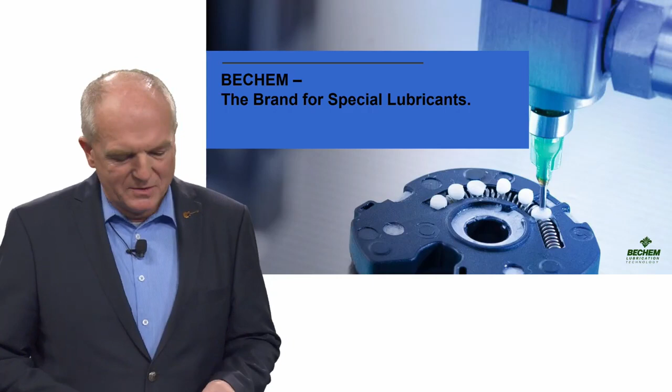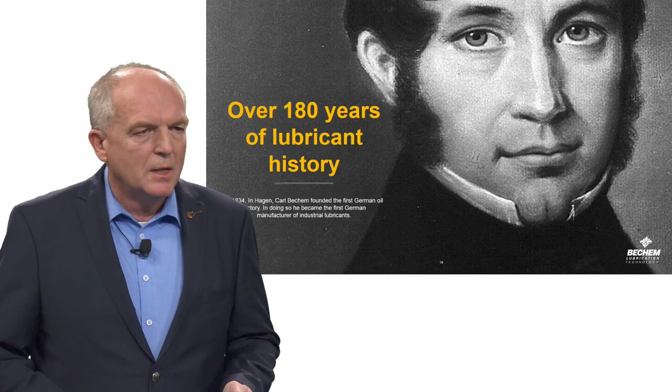We have different products in different areas, for example, for lubricating greases, lubricating oils, metal removal fluids, metal forming fluids, anti-friction coatings, and also corrosion preventives and chemical cleaners. We have 3 production sites in Germany, and then 1 in the US, 1 in China, and 1 in India. More or less 900 living, actively sold products, not only spray cans like you see here, but drums would be too big to show it here on the screen, so therefore we decided to go for a can, but nevertheless we can supply all kind of packing.

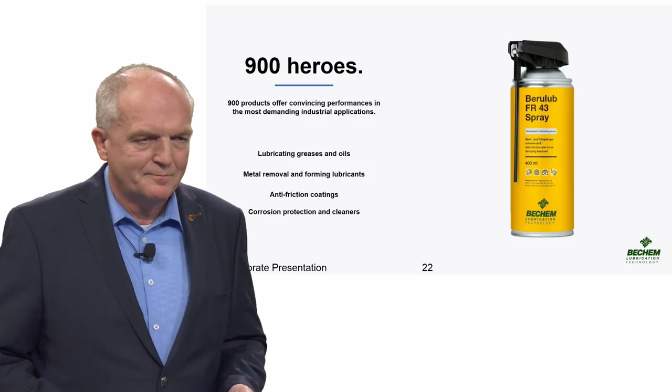And we are supplying these products in different kind of industries: the automotive industry, the aircraft industry, the railways, mining industry, earth moving equipment, metal working, metal forming industry, food processing, wood processing industry, and so on. So we are really the specialist for different kind of industries and different kind of application.

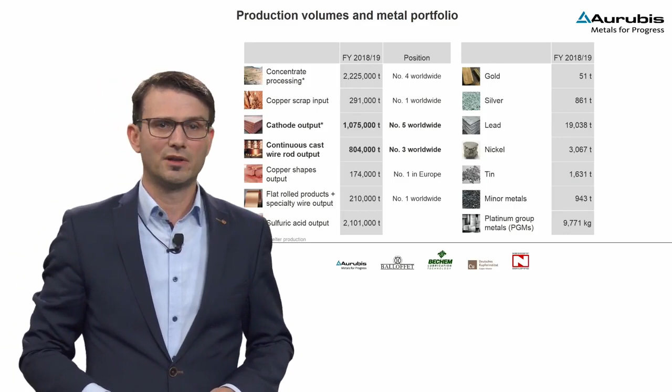Aurubis holds strong and leading market positions in cathode production output and respectively in copper wire rod output. Here you see figures from financial year 18-19 with around 1.1 million tons of cathodes and around 800,000 tons of wire rod. Beside that, Aurubis is a multi-metal refining company and produces metals like gold, silver, lead, tin and others. Aurubis has its own cathode basis, which is a fundamental position for our copper products and especially for copper wire rod, where 75% of all cathodes worldwide are consumed. Aurubis is independent from cathode supply from South America or other regions, but can rely on its own and very stable cathode supply.

Aurubis runs a production network of 2 fully integrated plants with cathode and rod production in Hamburg, Germany, and in Olen, Belgium. In Avellino, in the south of Italy, and in Emmerich, Germany, there are 2 standalone rod plants, with cathode supplies from partly Pirdop, Bulgaria, and Lünen, Germany, as well as Olen, Belgium. Deutsche Gießdraht, the well-known copper wire rod producer of DG Rheinrod, located in Emmerich, is now 100% integrated into the production and service network of Aurubis Group.

DG Rheinrod is a very well-known brand and stands for highest surface quality and drawability to thinnest wire diameters. The 4 rod lines are in excellent balanced production network to supply our customers in the EMEA region, from North Europe to South Africa, from Morocco to Egypt, with around 800,000 tons per year of Aurubis rod, Rheinrod.

Responsible sourcing is becoming more and more important due to society requests. Therefore, the copper industry, and Aurubis as part of that, launched in March 2020 the Copper Mark as an industrial standard monitored and assessed by independent parties every 3 years. This goes hand in hand with the LME's responsible sourcing approach. At Aurubis, we like and support the idea that the copper value chain is mutually demonstrating responsibility to improve and develop, and we are looking forward to certified mines.

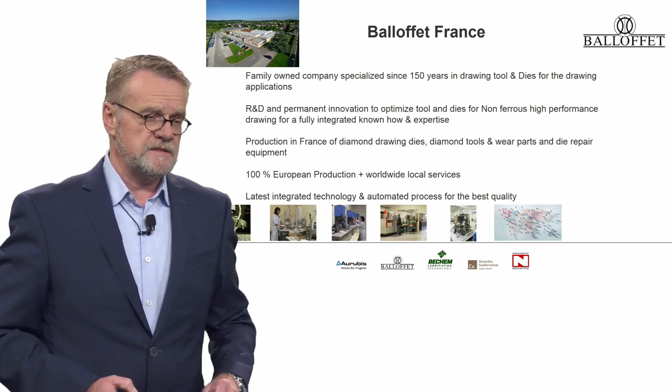Our product description for Balloffet is drawing dies from natural diamond and PCD, extrusion tools for the cable industry, also the compacting and stranding dies. Shaped dies is a very, very big growing market, also for the electric mobility. Enameling guides for the magnet wire, but also a big repolishing service for all used dies. We are also specialists in training and analyzing on the die repair of all people working in this field, and we are producing equipment for the die shop.

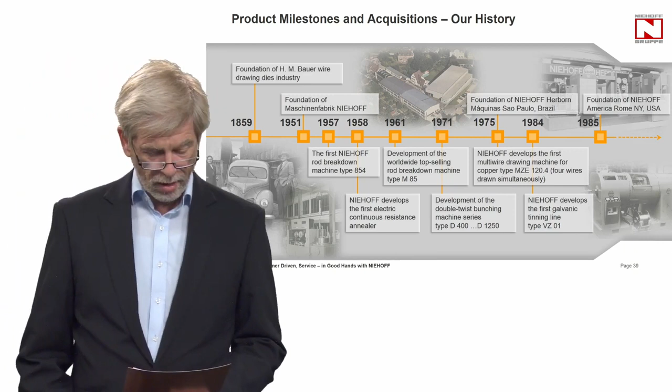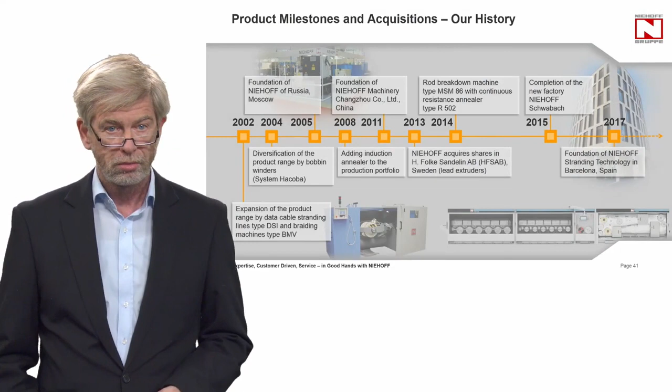NIEHOFF company was founded in 1951, but the origins or roots go back to 1859. But listing all these historical details would be too long. However, the new construction of the factory, which was completed in 2015, should be emphasized.

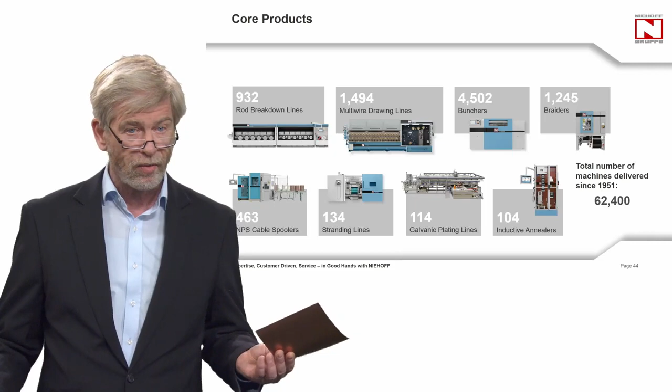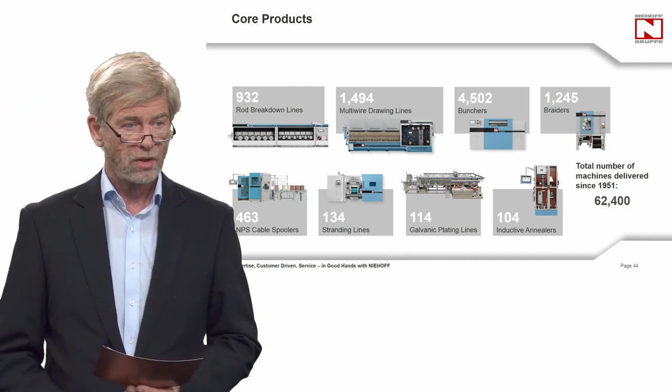Our products. Since 1951, NIEHOFF produced 930 rod breakdown machines, nearly 1,500 multi-wire machines. We produced 4,500 bunching machines with a bobbin size from 400 up to 2,000 millimeters. Braiders, NPS spoolers, stranding machine for insulated wires, also with a bobbin size from 400 up to 2,000 millimeters. Galvanic plating lines, and last but not least, inductive annealers.

Mobility, urbanization, energy distribution, digitalization, power generation - these are the challenges of today and tomorrow. And how do we face these challenges? We are partnering with expertise, high cost efficiency, high flexibility, and reliable service worldwide. These are the demands on us and how our customers see us.

Thank you very much, Stefan. Okay, good introduction of an amazing company, and thanks for coming to Hamburg. Okay, thank you very much.

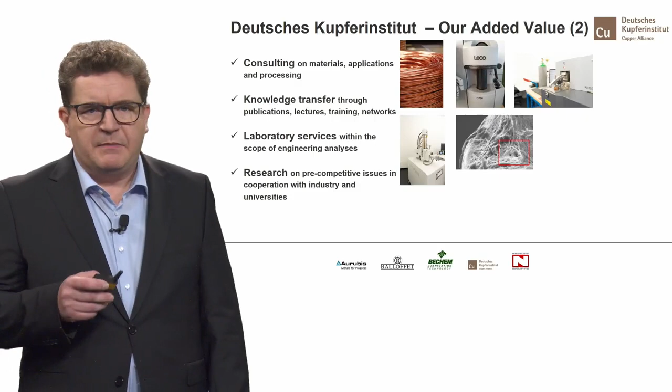But first, I would like to ask you to answer the following questions via Mentimeter. In your opinion, which elements are most important for a successful drawing process? Please choose and add them one after the other with a plus symbol, first the most important, last the least important: the die sets, the drawing lubricant, drawing machines, the people in the production process, or the wire material. Please vote now - we will have a look at the results later.

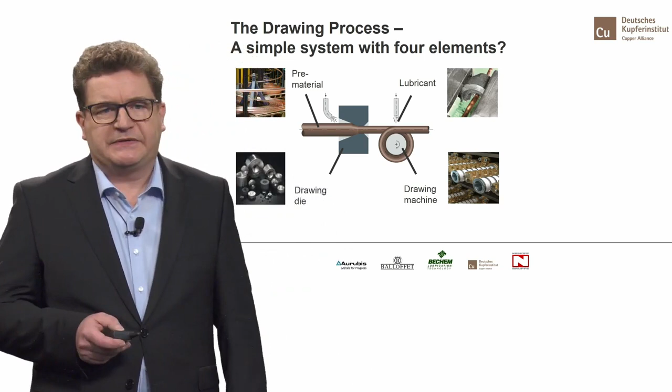When looking at the drawing process, it seems at first glance to be a fairly simple system with four main elements. In practice, however, the interlinking of several processes and a large number of drawing steps results in a complex system in which the causes of errors are not immediately recognizable, and the interaction of many individual influencing factors has an impact on quality and process stability.

Last but not least, the conception, selection, maintenance, and settings of the system elements are based on the decisions and assessments of the people involved in the process. Knowing about the process and the elements is therefore essential to achieve good results. In the following, we will now use the cup and cone breaks as an example to explain the influence of the individual system elements - wire material, drawing die, drawing medium, and drawing machine - on the drawing process.

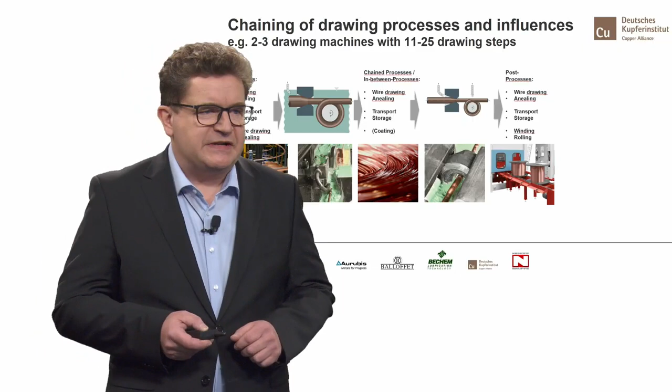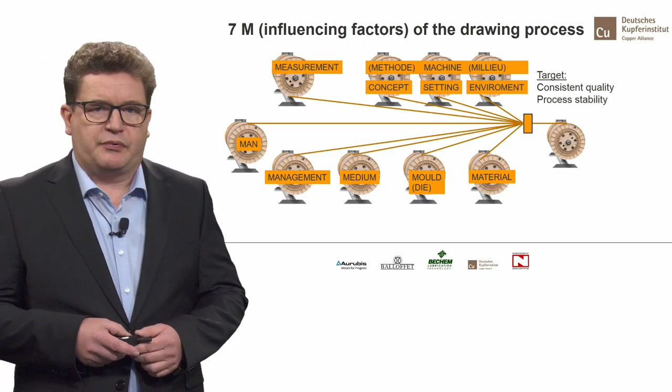And now I'm looking forward to Dr. Abrates from Aurubis AG, who will first give us an overview of the wire rod production process. Please, Dr. Abrates.

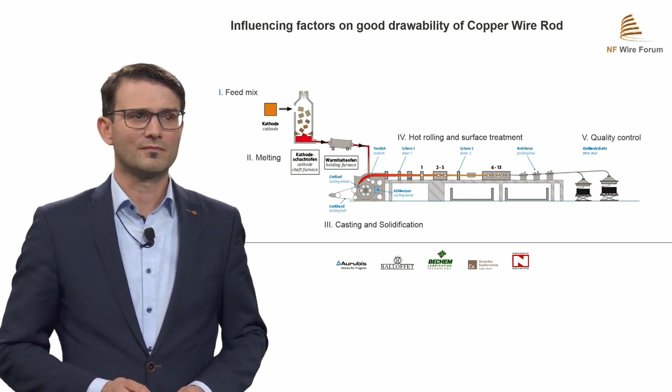Please see here the criteria which are important and form the basis for a successful drawing process of Aurubis Rod, Rhine Rod. As mentioned, best feed mix with grade A cathodes, oxygen content below 250, a delta temperature of copper melt versus copper solid temperature, cooling water min-max values, rolling current at the rolling stands in min and max values, low Defectomat and Ferromat signals.

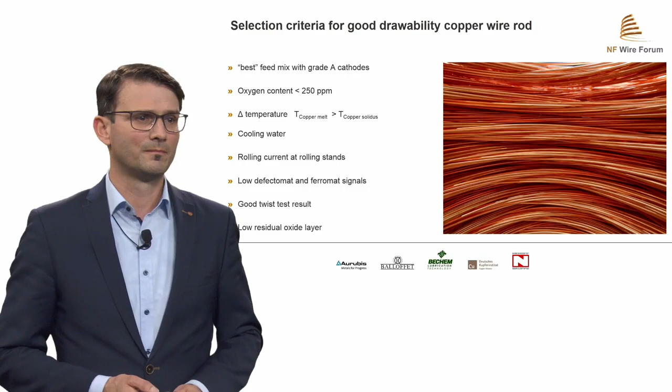Good twist test results, and last but not least, low residual oxide layer. But unfortunately, there are incidences resulting in wire breaks, which lead to downtimes in your production departments. It's important to understand what kind of wire break type the sample shows and what leads to the different wire break types.

All in all, a wire break is the unfavorable result of interactions between the wire material, drawing dies, emulsion, and the machines, as well as drawing process parameters.

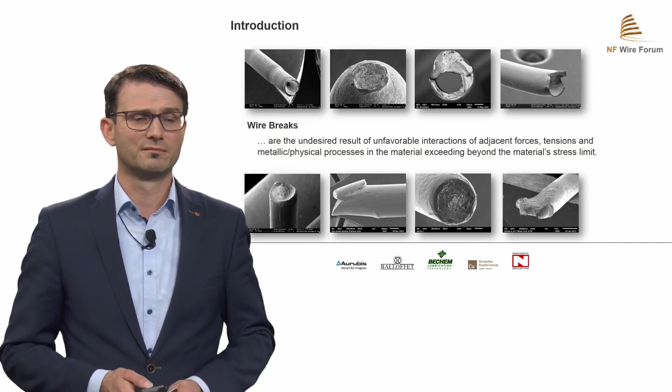In general, there are well-known wire break types which occur from time to time in every wire production facility. There are three main types: first, cup and cone; second, ductile force break; third, inclusion break. Other mentioned types are also known and present, but with less frequency in our experience.

Let's look at the features of a wire break known as cup and cone. What is important? You see here a deep hole on the cup side, a cavity in the middle of the wire, and a cone. You see a necking tip.

You see surface defects, shown here on this photo. When you do a metallurgical cross-section, a longitudinal one, you see the so-called craw feet in the longitudinal cross-section—so no impurities, no phase agglomerations in the copper wire matrix.

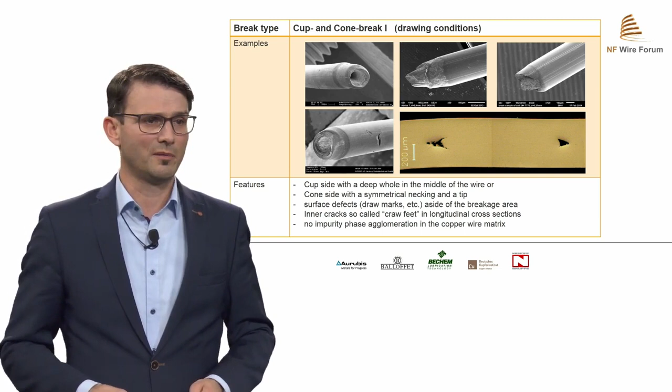What are the damage mechanisms? High shear stresses between the wire surface and the neutral line induce local failures where the max material stress level is exceeded. Then the inner cracks, the craw feet, begin.

The tip of the craw foot is oriented in the drawing direction. With additional strain, these cracks grow and reduce the load-bearing cross-section of the wire until the material fails or breaks. The copper wire rod can also influence cup and cone breaks, which is why it's important to apply the appropriate production criteria mentioned earlier to avoid them.

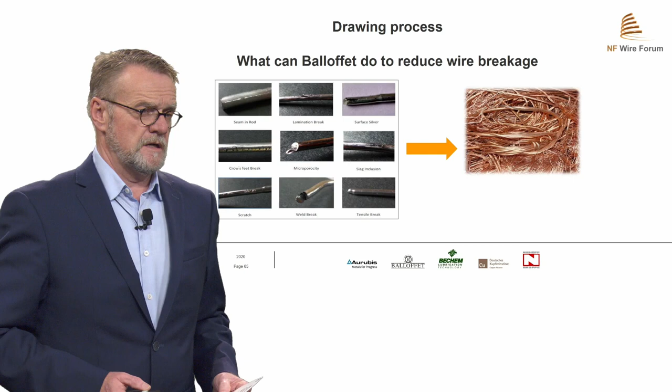Wire breakage is not really nice. Nobody wants these, because wire breaks normally mean less productivity. We lose a lot of material. It is inefficient. But the question from my side and from the Balloffet side is: what can Balloffet do to reduce wire breaks?

The wire breaks, the view from the die producer is as follows. We have to check if the customer has used the wrong diameter, or the geometry is not respected, the polishing is too rough, the dies are not cleaned, we have mishandling on dies, we have imperfect technical matchings, so the specification from the drawing machine is not corresponding to the die sequence. The dies are fixed on the wrong position.

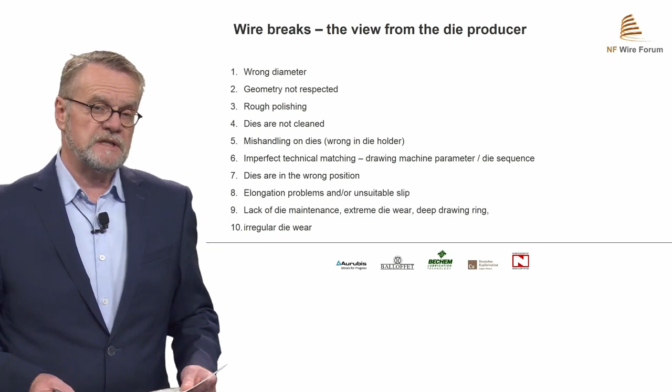The elongation problems and the slip is not suitable. We have a lack of maintenance, die maintenance. We have a lot of die wear. We have deep drawing rings, or we have irregular die wear. This is mostly a problem of wire breakage.

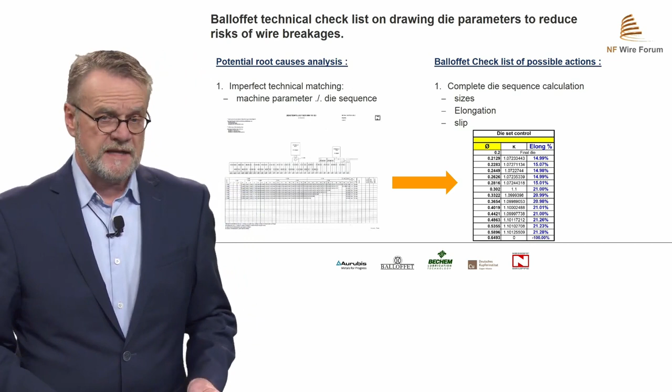At first, we have a checklist, and our technical checklist from Balloffet is to check all the parameters to reduce and to find the result. The root cause is, at first, we have to check the machine parameter and the machine specification, and to clear if the machine parameter is fitting to this die sequence. This is what we have to control, and you see here in these tableaux that you can check if this is correct.

The next step on the checklist is the check of the elongation. Is the elongation respected? What is later on the possible action by us is to control if the difference between the die elongation and the machine elongation is checked.

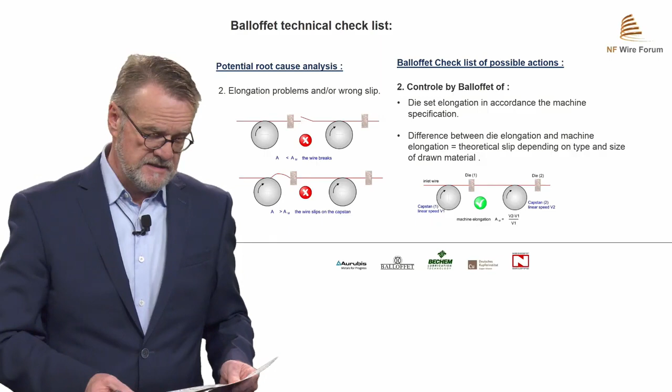On the dies, we have also many issues to control. The diameter at first, but also the not fitting geometry. We have to check the polishing, and we have also to check if we have used probably wrong tolerances. For these, we have a special specification where we see in the die if the blending is well made, and if we have on a multi-line machine tight tolerances, we have to check that from time to time we have 500 dies on the machine, and these have to fit.

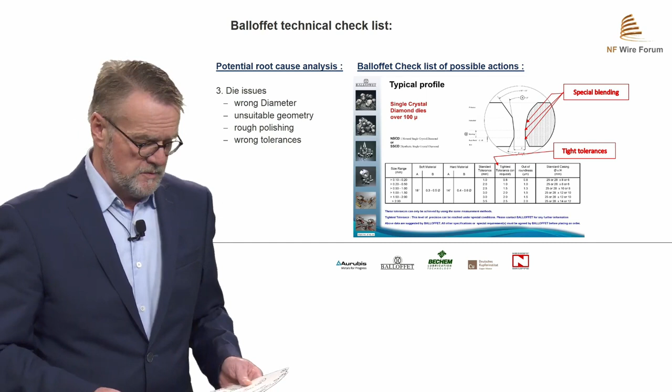The die analysis also checks the issues in the die. Is the die size with the adapted tolerances produced? Is the die geometry respected? The die blending, so it means from the angle to the bearing length, is this well polished? Is this not too sharp? And this is where mirror polishing is made.

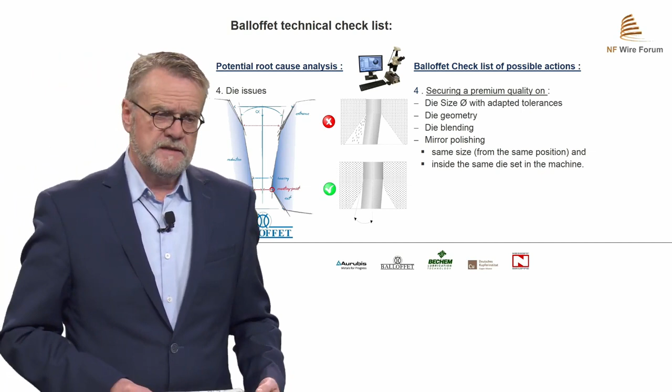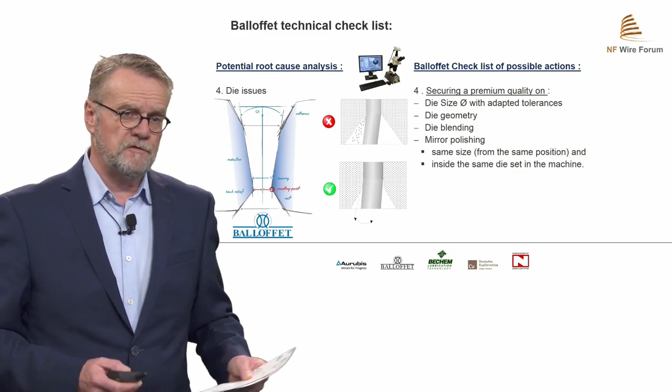And also the exit is very important, because if we produce fines in the wire process, then we produce the fines on the exit of the die. So it has to be nicely rounded. And what is very important on a die set is that all the same sizes on the same position on the machine have to be respected. And this means not for one set, for all sets, and in total probably 500.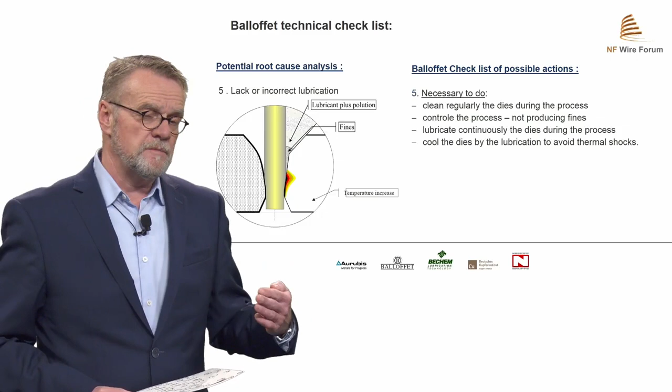Coming back to the next check, what we have to do is the lubricants, because we have to secure that the die is very clean and very regularly cleaned with a spray of lubricants during the process. Because if you see some fines in the die, it is coming from the die before, and the result is seen on the next coming die.

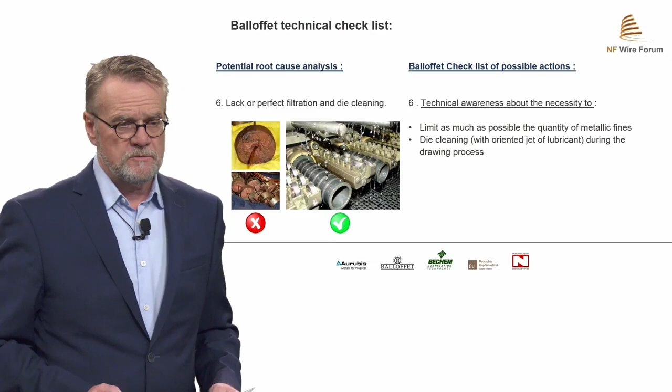The lack of perfect filtration and die cleaning limits as much as possible the quantity of metal fines. That means reduce the metal fines and clean the dies during the process. And this has to be made by a jet of lubricants during the drawing process.

And also the extreme drawing parameters, because we're using high speed, we have ultra-fine wires, we have a reduced slip. That means our dies have to be perfect, absolutely perfect. We have to check if there is a drawing ring inside, because in a drawing ring we are sticking material, and we take this material into the next die and we create problems. And if we have these problems, we create thermal shocks.

The thermal shock means we can produce a diamond pull-out or a breakage of the die. We have to check also the impact point, and if we take out a used and worn die out of the machine, we can read it like in a book.

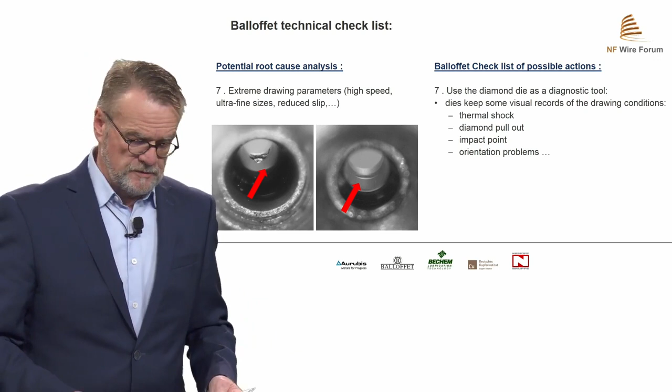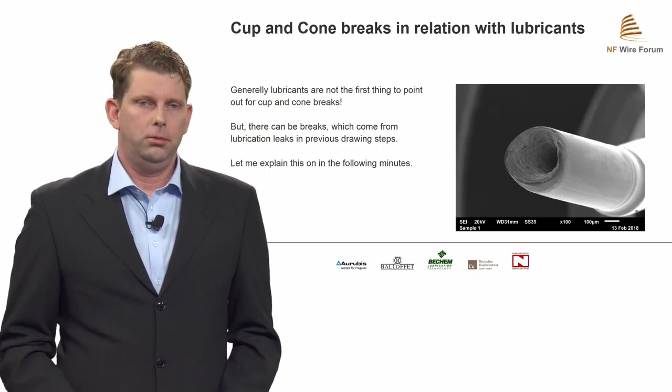Honestly, in general, the lubricant is not directly the first thing to point on if you have a cup and cone break. Nevertheless, it can be a cause for a cup and cone break if there were failures in the previous drawing steps, especially in the rod breakdown. I will explain this in the next slides. But as Michael already said, a lack in lubricity due to lubricity failures because of dirty dies or missing lubricant are points to get a cup and cone break due to lubricity.

So if we look at the rod breakdown, you can drive it with different drawing options. Typically, it is driven with a concentration of 12 to 18%, but it is also possible to drive it with 5 to 8%. But what is the result of this different drawing option?

First, let us take a quick look at a saving calculation for the lower drawing concentration. Let us estimate a system with 10 cubic meters and a price of €5 per kilogram for the lubricant. If we drive it with 15%, we would need 1,500 kilograms of lubricant, which rises to a price of €7,500 for the filling. If we do the same with the 5% concentration, we have 500 kilograms and €2,500, which gives you a saving of €5,000 estimated, plus maybe another €5,000 over the top-up time for 1 year driving. That would be €10,000 in total.

But what does this mean for the drawing process itself? First, your rod breakdown system maybe has to be driven a little bit slower. Normally 25 to 30 meters are possible, now you can only drive 20 meters, for example. So you have a reduced production capacity.

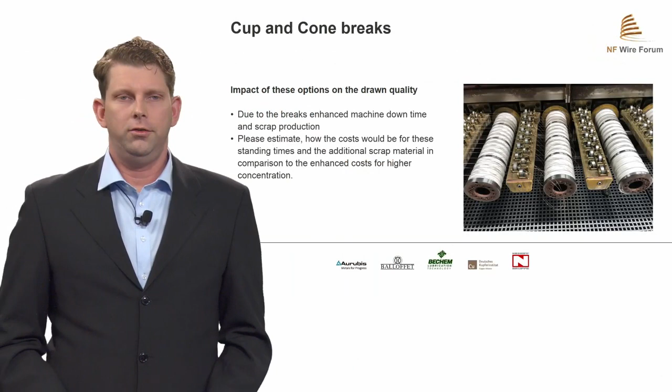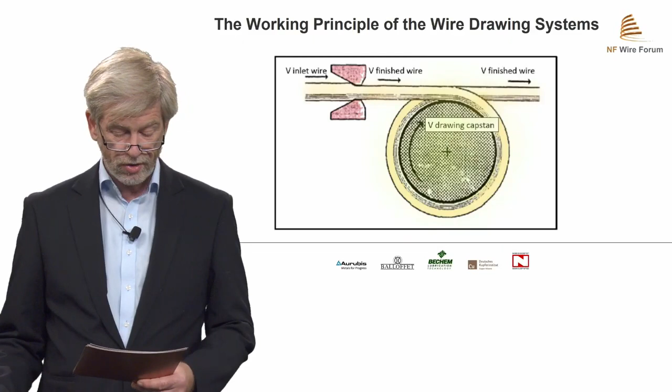This is the working principle of a drawing machine. The wire gets compressed in the die, and the diameter decreases while the length and speed increase. Here we need lubrication to lubricate or cool the process. Without or with too little lubricant, the drawing die and the wire will be destroyed. Surface roughness, wrong angle, wrong diameter - a wire break is inevitable. A broken wire based on this is normally a cup and cone break.

The wire is compressed in the die. We learned we have elongation between 55 and 26% for a rod breakdown process, and between 26 and 10% in a multi-wire or fine wire machine.

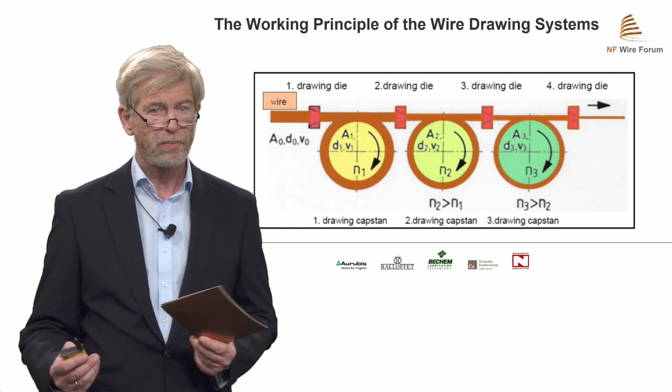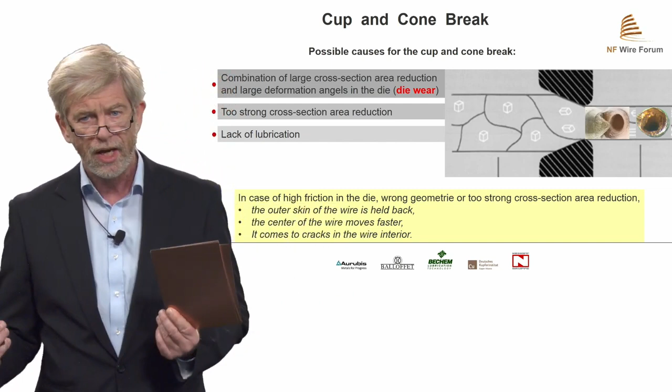For this process to work properly, everything has to be perfect, we said. But now let's see possible causes for the cup and cone break. There can be a combination of large cross-section area reduction and large deformation angles in the die.

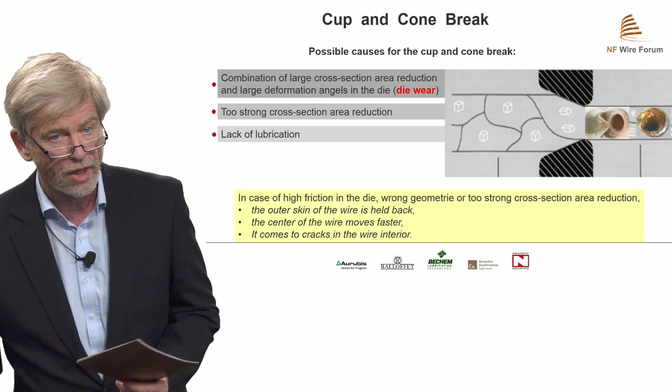That's called die wear. Too strong cross-section area reduction or lack of lubrication. In case of high friction in the die, wrong geometry, or too strong cross-section area reduction, the outer skin of the wire is held back. The center of the wire moves faster, and it comes to cracks in the interior.

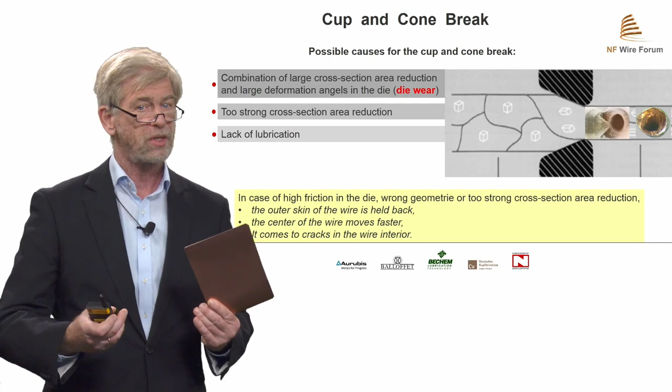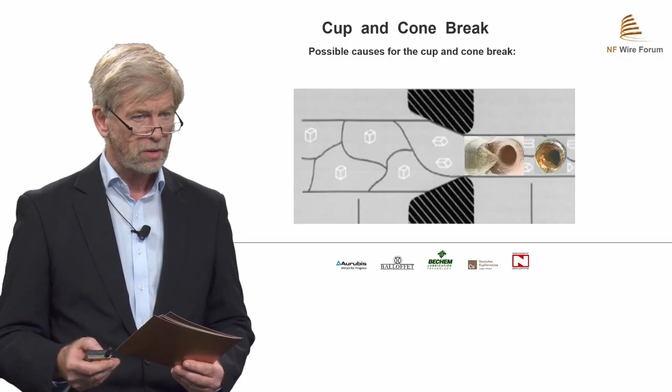So here, possible causes for the cup and cone break: a cup and cone break is normally caused in the die. Here we see a damaged die.

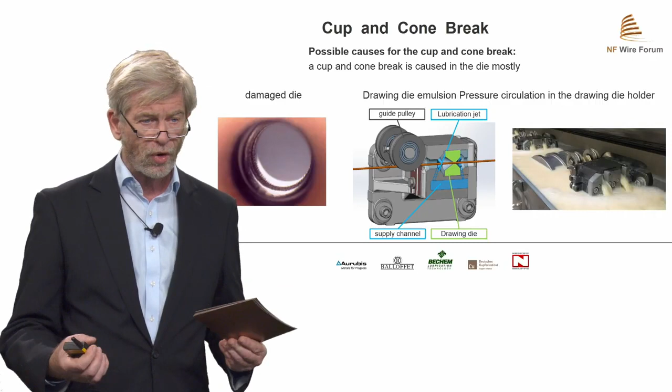The next picture shows an emulsion circulation system in the drawing die holder, how it should be. Emulsion flow, how it should be. But if the die holder is dry, then it's creating problems. If you don't clean the lubrication system regularly, the flow channel can become clogged with deposits or copper flakes. No lubrication comes to the die, a wire break is inevitable.

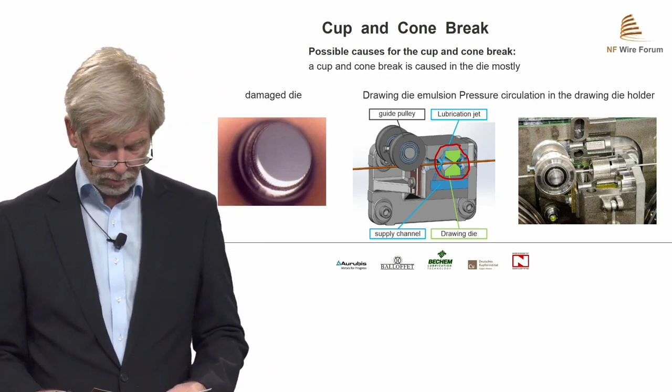So, something about the wire break. The cone tip of the break always shows in the direction of the drawing. But notice, if in a fine wire drawing machine or multi-wire machine the cone tip shows against the drawing direction, then it's a clear indicator that the error cause originated in the rod breakdown machine.

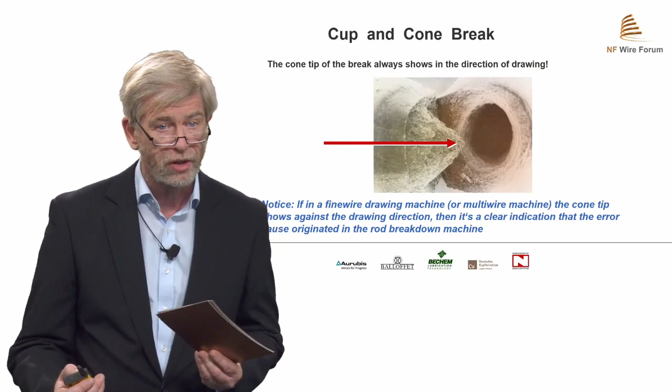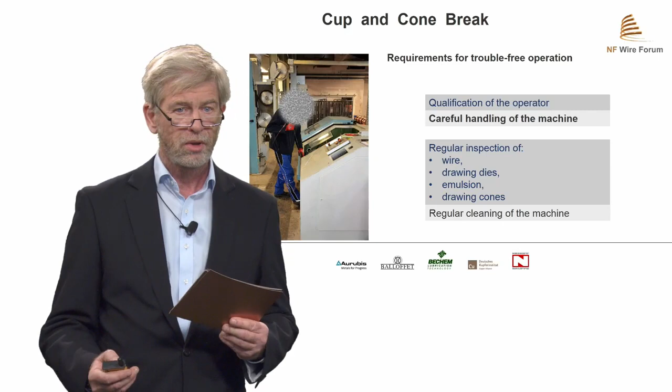Some requirements for trouble-free operation. The first thing I want to mention is the qualification of the operator. This requires: careful handling of the machine, regular inspection of wire, drawing dies, emulsion, drawing cones, the filtration system, and regular cleaning of the machine.

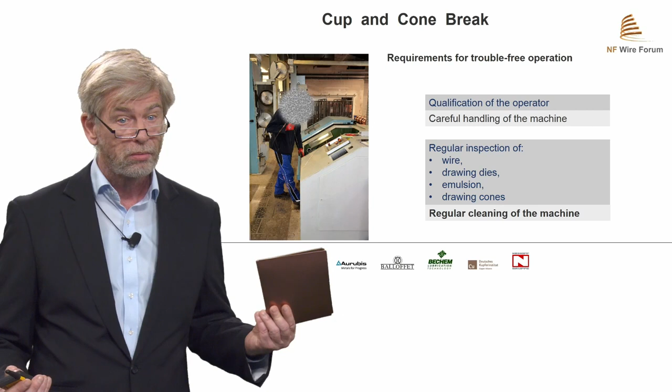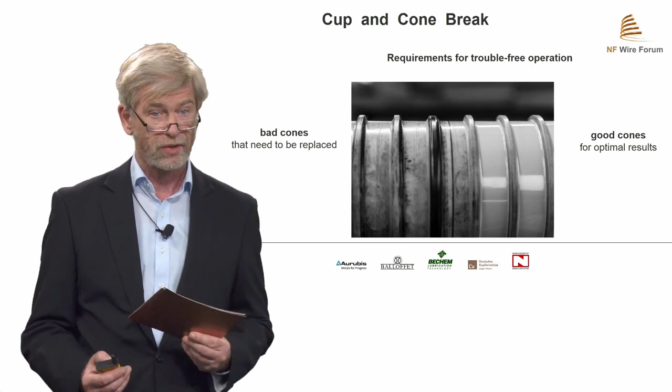On the left side, we can see a bad cone that needed to be replaced. On the good side, the right side, a good cone for optimal results. Here are some examples of how it shouldn't be. The last example doesn't cause a cup and cone break, it causes a tensile break. And this is a tensile break, not a cup and cone.

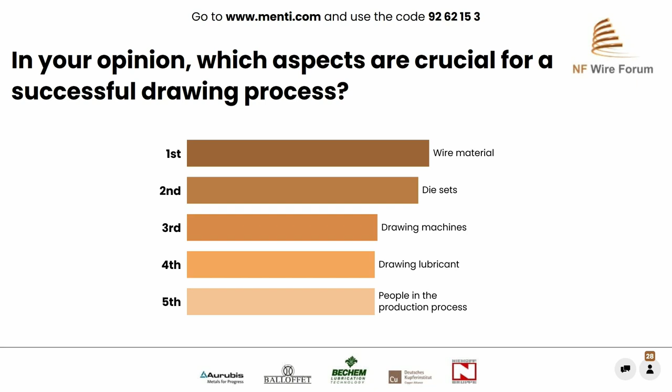Welcome back to start our panel discussion with all 5 partners right now, here live on the stage. So, what do you think about this result? Is it as expected? Cornel, please comment on being first in that ranking, the wire material.

Yeah, I'm not surprised about your answers and your votes about the wire material. It is important, as shown in my presentation, but it's only one component in the system of what we have—the machine, the dies, the lubrication. So everything counts, and the rod is one part of it.

Thank you, Cornel. I believe the second one was the die set. Michael Biller, what do you think about that?

It's nice to see from our side that die sets has this big meaning in the process, but as Cornel said, it is really one of the parts for optimized production. We need a good machine, good pre-material, and good knowledge of the worker on the machine. Die set is important, but also the lubricants, we can't forget. Everything works together. We can't take one as the main part. It's a combination of all 5 things.